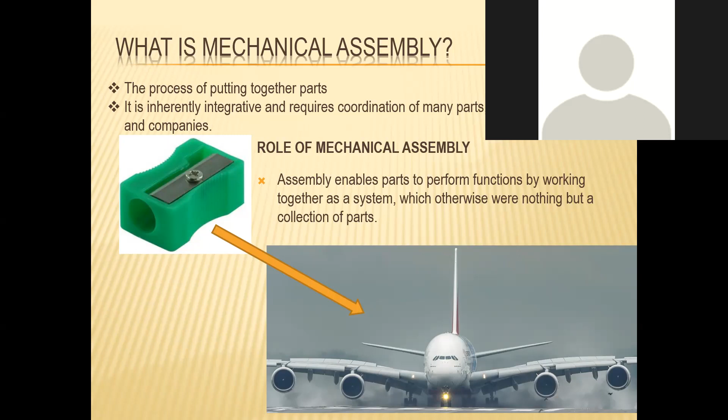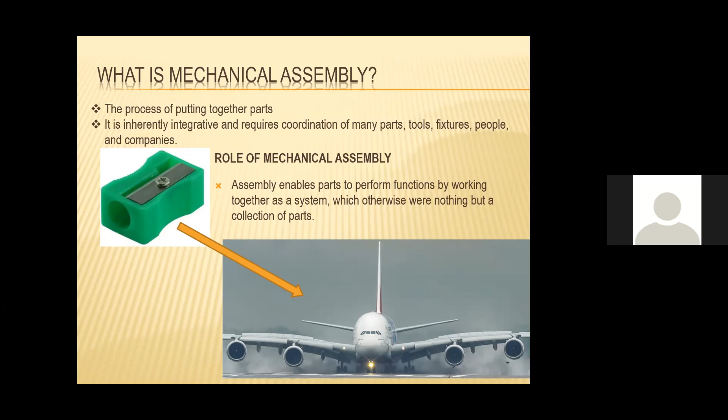because of this fatal accident. So at that time, the team visited the site and they started looking into the root cause for this particular accident. And that particular team started investigating the black box recording and other things by looking at different components of the crashed plane. They ultimately came across that the plane crashed because of the engine failure. And engine failure was because of the excessive vibration into the engine.

And later on, a team was formed, which started investigating what was the problem in the design of that particular engine and how can we improve that design. So alhamdulillah, I was lucky enough to get into that project, and I was a part of that team. And my main role was to minimize the... normally we see that the vibration can be caused by two reasons. One is the mass imbalance, and other is geometric eccentricity of the particular jet engine rotor.

Because jet engine is simply an engine which has a rotor which contains turbines and compressor all coupled in a single shaft. Okay, so it has got HP compressor, then intermediate compressor, LP means low pressure compressor, and similarly it has got low pressure turbine, intermediate pressure turbine, and high pressure turbine. These all are coupled as a single component. And these all are parts which are axially symmetric as well.

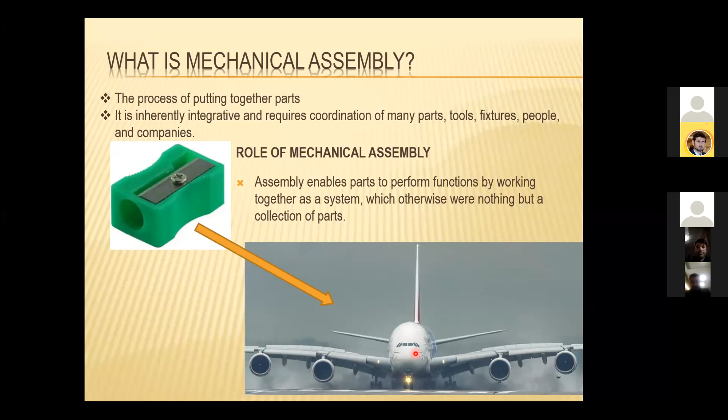Okay, so let us start again, looking into the assembly of other components. Similarly, there are different assembly lines in different industries as well. If you look at an industry which assembles parts together, what do they do? They first of all collect the parts from different locations. Either they manufacture locally, or they purchase from other vendors, suppliers or industries.

If I give you an example, I'm sorry to quote it, कि आपने देखा होगा पाकिस्तान के अंदर, within Pakistan, there are some automobile companies, and for the same company, we also get imported cars. वही Japanese assembled car पाकिस्तान में आए, एक कोई भी brand, मैं brand का नाम नहीं लेना चाह रहा, I don't want to take the name of the brand.

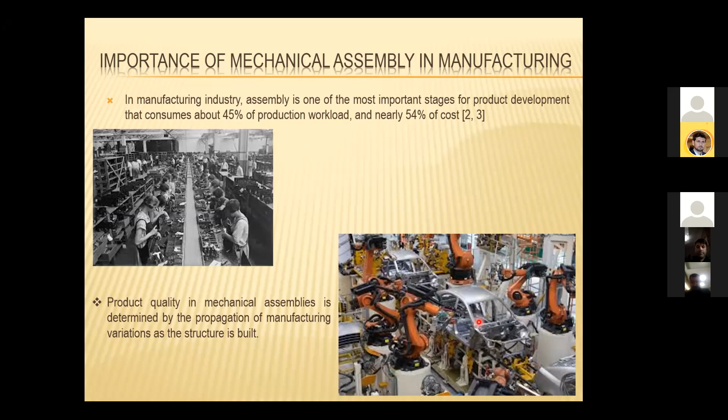And if the same brand is assembled in Pakistan, and I'm sorry, because of lack of skills or negligence of the workers, they do not properly look into the assembly parameters, and you find the quality of the car, quality of drive, quality of comfort within that particular car differs. With a car imported from Japan and assembled there, looking into all the features of the assembly design, you feel a lot of difference in the quality of that product. And this is only because the assembly parameters are not taken into account properly.

Now let me start giving you basic modeling of assembly through a very common example, a stapler. I think you all are very well aware of the stapler. The function of this stapler is to pierce the pins, staples, into a bunch of papers so that the papers are connected together. So this is the basic function of the stapler.

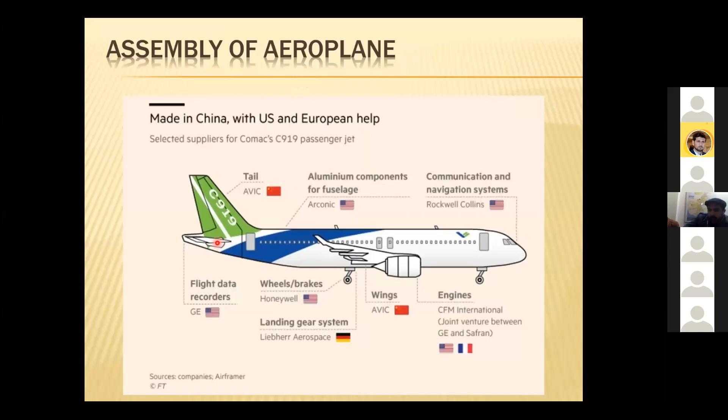So in this particular case, before going into depth, looking at this example, we see the tolerance limits, tolerances or geometric variations within the component. Whenever any part is being produced, it is manufactured, we say nothing is manufactured perfectly to its design specification.

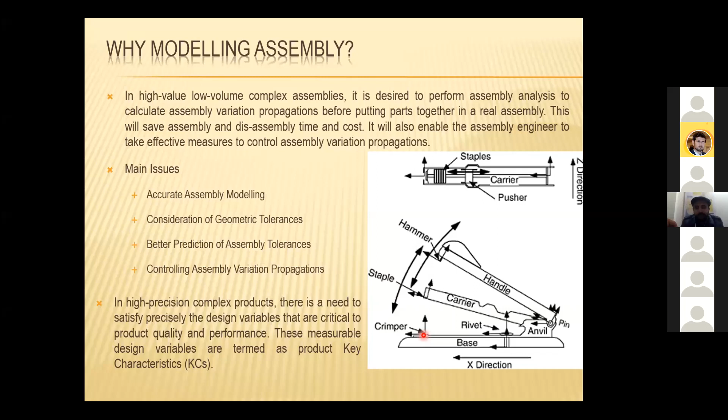So obviously there are certain manufacturing errors which are inherent because of the manufacturing process, but we allow certain variations. Those are called the tolerances or the geometric variations. Now let us first look into the geometric variations, which play a major role in the accumulation of error of the final product.

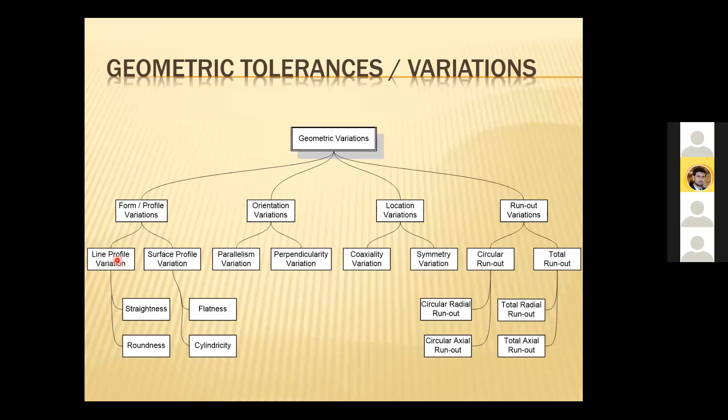And location error, coaxiality, symmetry, runout variations.